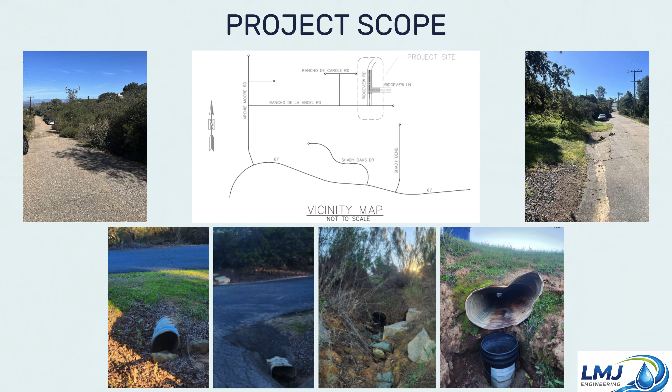In addition, the project includes the development of a building pad for future use, which requires proper grading and site preparation while ensuring it integrates with the overall drainage design. Throughout this presentation, we will walk through our approach and supporting analysis that guide our final design.

LMJ Engineering is composed of highly qualified engineers prepared to address drainage projects just such as this. Led by Justin Gibb, our team developed key deliverables including the basis of design, geotechnical and drainage studies, stormwater management plan, structural calculations, and the engineer's estimate. These components were evaluated using the Envision pre-assessment checklist and integrated into our final plans and drawings to deliver a complete and coordinated design solution.

Malukas Techs developed the geotechnical report, which includes recommendations for foundations, retaining walls, pavement design, soil mitigation, and bearing capacity. The analysis was based on laboratory and boring log data and conducted in accordance with ASTM standards, the Caltrans Geotechnical Manual, and the 2025 California Building Code, using standard design assumptions for site conditions.

This geotechnical investigation evaluates subsurface conditions at the project site through geologic mapping and laboratory testing. The geologic map indicates the site is primarily underlain by granitic rock, which provides a relatively strong and competent foundation material but may vary in strength depending on the degree of weathering and fracturing.

To further assess soil behavior, direct shear tests were conducted on representative samples of the weathered granitic material. The results provide key shear strength parameters, including cohesion and internal friction angle, which provide us with essential information for evaluating stability and design loads. Overall, the subsurface conditions provide a strong basis for long-term stability and performance.

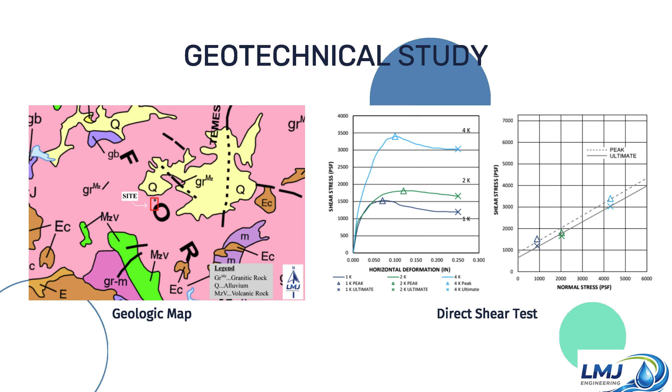Lene Leininger and Julia Baxter have prepared the drainage study to summarize the engineering approach, assumptions, and design criteria used to evaluate the drainage conditions at the project site. The scope includes both hydrologic and hydraulic conditions under the existing and proposed conditions based on a 100-year storm event.

This project was designed in compliance with several key standards, including the City of San Diego Drainage Design Manual and Hydrology Manual, and the San Diego County Hydraulic Design Manual. To study the initial capacity of the system, watersheds were first delineated using ArcGIS. Then runoff was calculated using SANDAG land use and soil type data layers.

For this site, the major soil type group is hydrologic soil type D, meaning that the soil has a slow infiltration rate and high runoff potential. Land use assumptions were based on residential designations. The before grading condition coefficient of runoff was calculated, averaging watersheds 4 and 5 for storm drain pipe 4.

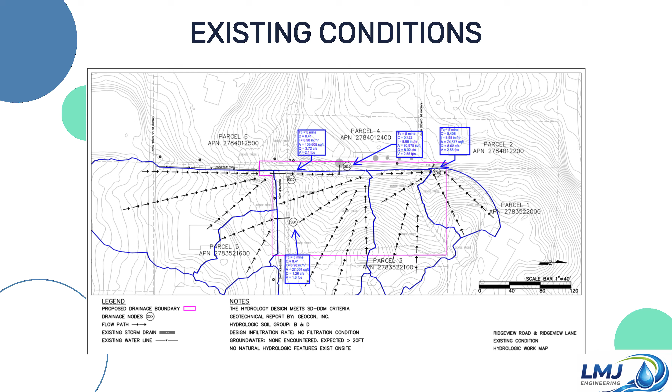In this image, flow and velocity were calculated using Manning's equation. For all calculations, the minimum slope of 0.5% was used. For the proposed analysis, we evaluated how the grading and a 100-year storm event would impact the existing infrastructure to see if it was undersized. We used the rational method to estimate peak runoff, assuming a minimum time of concentration of 5 minutes.

Rainfall intensities were taken from the County of San Diego isopluvial and IDF curves. With the proposed development adding 1.06 acres of graded area and about 70% impervious surface, runoff increases, raising the runoff coefficient for storm drains 3 and 4. As shown, the system is undersized for storm drain pipes 1 through 3. Pipe 1 should increase from 12 to 18 inches, Pipe 2 from 18 to 30 inches, and Pipe 3 from 24 to 30 inches.

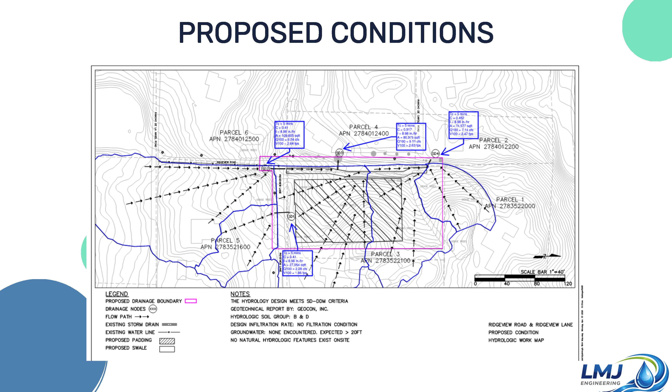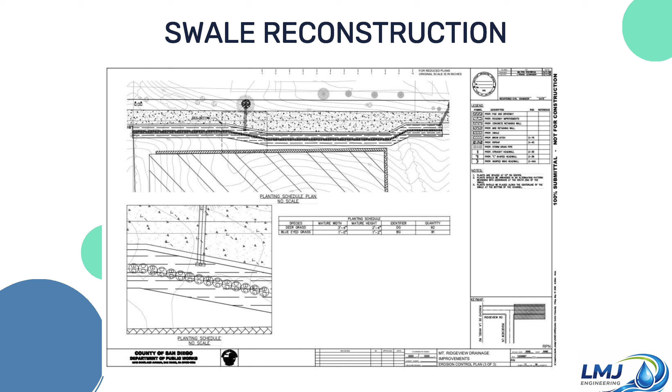Pipe 4 should be replaced with a 24-inch pipe due to structural failure. Reinforced concrete pipe is the chosen material due to its durability. Utilizing the runoff flow rate from the proposed conditions that accounts for the new impervious surfaces, a swale alongside Ridgeview Road was designed. The design works with the existing topography and storm drain pipe locations to channel runoff towards low points at the pipe inlets.

The swale itself is lined with number 2 riprap backing and native plants along the bottom of the swale. Ramona, California is low risk due to its rural setting, so basic erosion and stormwater controls are sufficient. LMJ Engineering recommends adding drought-tolerant native plants like deergrass and blue-eyed grass to the swale, which will help slow down runoff and naturally filter out sediment and pollutants when it rains. Riprap will be implemented in the swale as well as the outlet and inlet of each pipe.

Using the Institute for Sustainable Infrastructure Envision system, the project is on track for a silver award highlighting its sustainability, resilience, and community benefits. Maber Manu prepared the structural calculations package to summarize the design approach, assumptions, and criteria for evaluating the proposed drainage and structural improvements. The scope includes analysis of culverts, head walls, outlet stabilization, a brow ditch system, and retaining walls.

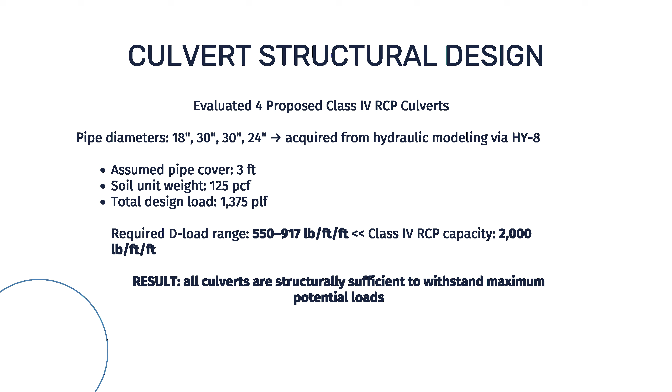The project was designed in accordance with applicable ASTM and County of San Diego standards, including the regional standards and hydraulic design manual. 4 proposed RCP culverts were evaluated using this design criteria. The required loads range from 550 to 917 pounds per foot per foot, which is well below the Class 4 capacity of 2,000, confirming all culverts are structurally adequate.

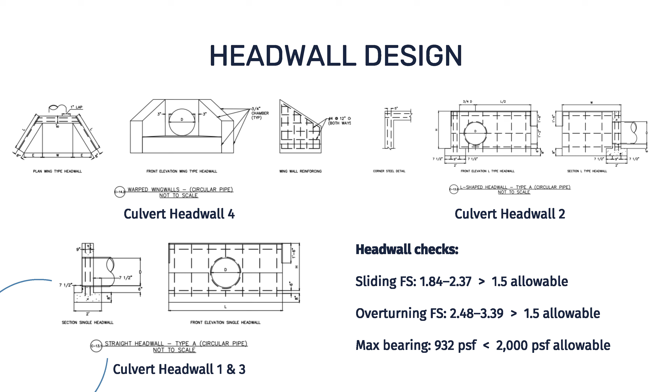4 head walls were analyzed, including straight head walls for culverts 1 and 3, an L-shaped return wall for culvert 2, and a warped wingwall head wall for culvert 4. Stability checks show sliding factors of safety and overturning well exceeding the 1.5 requirement. Maximum bearing is about 932 psf, which is below the 2000 psf allowable, making all head walls stable.

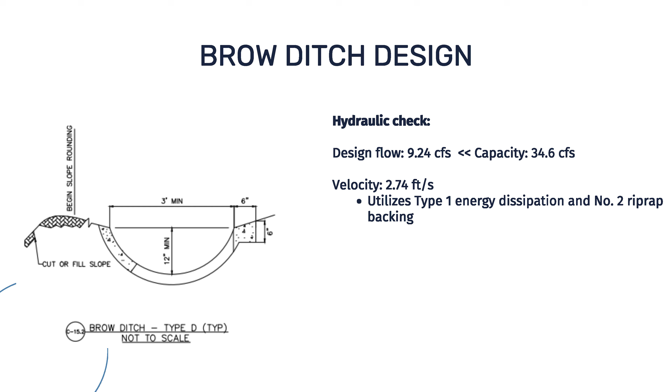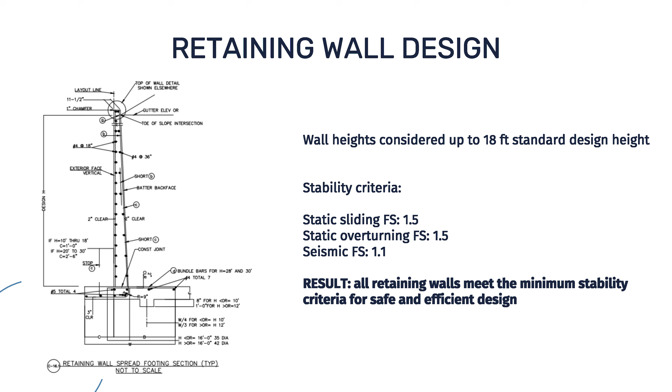The brow ditch is designed as a concrete-lined Type D ditch, about 30 feet long with a 1.5 foot depth and 4.5 foot top width. It conveys a design flow well below its capacity at 34.6 CFS, with erosion measures in place to slow flow velocity. Retaining walls were designed using the standard Type 1 system, with heights considered up to 18 feet. Surface drainage is controlled using a concrete-lined brow ditch at the top of the slope to intercept runoff and reduce hydrostatic pressure, with exceeding stability requirements, confirming a safe design.

Justin Gibb prepared this engineer's estimate to summarize the construction costs associated with the proposed drainage and site improvements for the Mount Ridgeview drainage project. The estimate includes itemized costs for storm drain installation, swale and channel reconstruction, roadway restoration, retaining walls, and site grading based on calculated quantities and unit pricing. Unit costs were developed using regional standards, including the Caltrans contract cost data, the San Diego County unit price list, and the City of Del Mar bonding cost data to reflect local construction conditions.

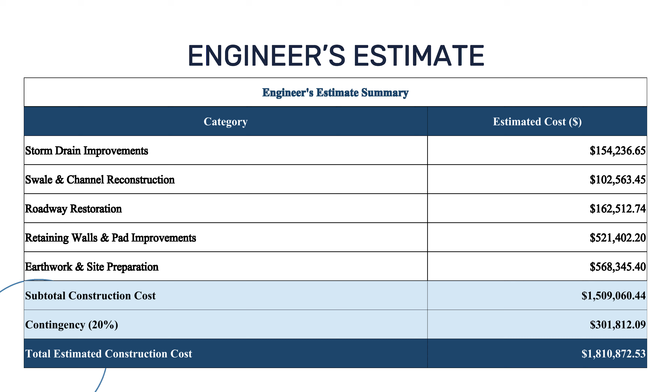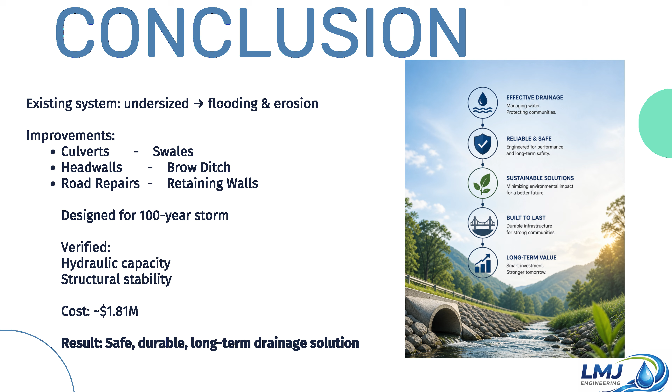Overall, the existing drainage system was undersized and led to flooding and erosion issues. The proposed design upgrades the roads and culverts, adds head walls, swales, a brow ditch, pad developments, and retaining walls, and is designed for the 100-year storm event. Combined analyses confirm the system is hydraulically efficient, structurally stable, and constructible. In conclusion, this provides a cost-effective and long-term solution for improving drainage and roadway performance.